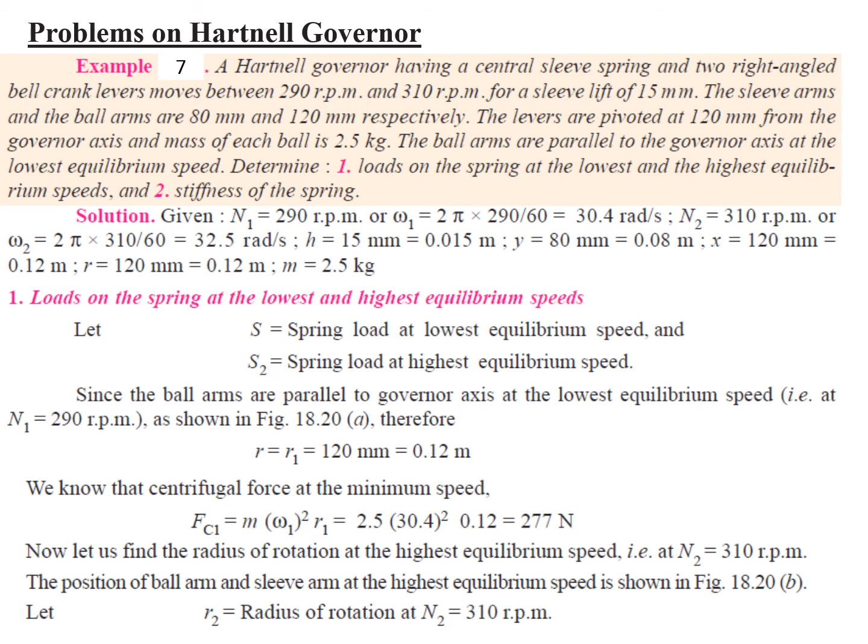See, H is equal to R2 minus R1 into Y by X. So R2 becomes R1 plus H into X by Y, which is equal to 0.12 plus 0.015 into 0.12 divided by 0.08, equal to 0.1425 meters. So now we know the value of R2.

Substitute for calculating the centrifugal force at maximum position or at maximum speed. So Fc2 is equal to m into omega 2 square into R2. Mass is 2.5 kg. The maximum speed in terms of radians per second is 32.5. R2 is 0.1425. Substitute all this, we will be getting the value 376 newtons. So these are the figures for lowest and highest equilibrium speed, lowest position and highest position.

So here it is in terms of right angle because the minimum radius of rotation is equal to the radius of rotation, that is the distance of fulcrum from the axis of rotation. And this is as he has told in the problem, it is the right angle type. So here R1 becomes R. So after finding the centrifugal force, we will be finding the loads at minimum position and maximum position, and then we will find out the stiffness of the spring.

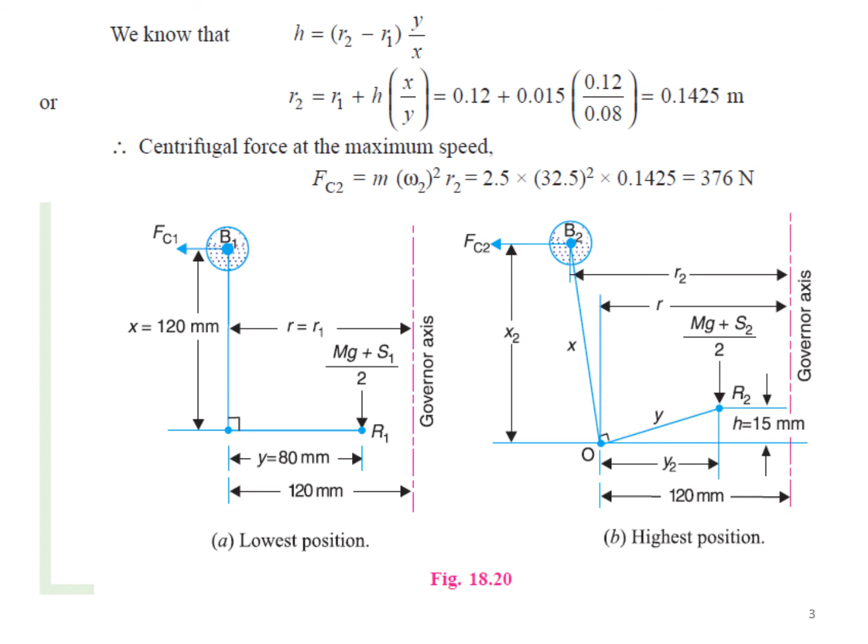See, and one more thing is here we neglect the obliquity of the arms. The obliquity of the arms is not taken into consideration for all the problems we solve here for your syllabus. What is the equation? M into g plus S1 is equal to 2 into Fc1 into x by y. Substitute all the values. So the value of S1 is 831 newtons.

Similarly for highest position, Mg plus S2 is equal to 2 Fc2 into x by y. Substitute all the values. You will be getting the value of S2 as 1128 newtons. Okay. So s is equal to S2 minus S1 by h: 1128 minus 831 by 15. That is 19.8 newtons per millimeter. So this is the equation for stiffness of the spring.

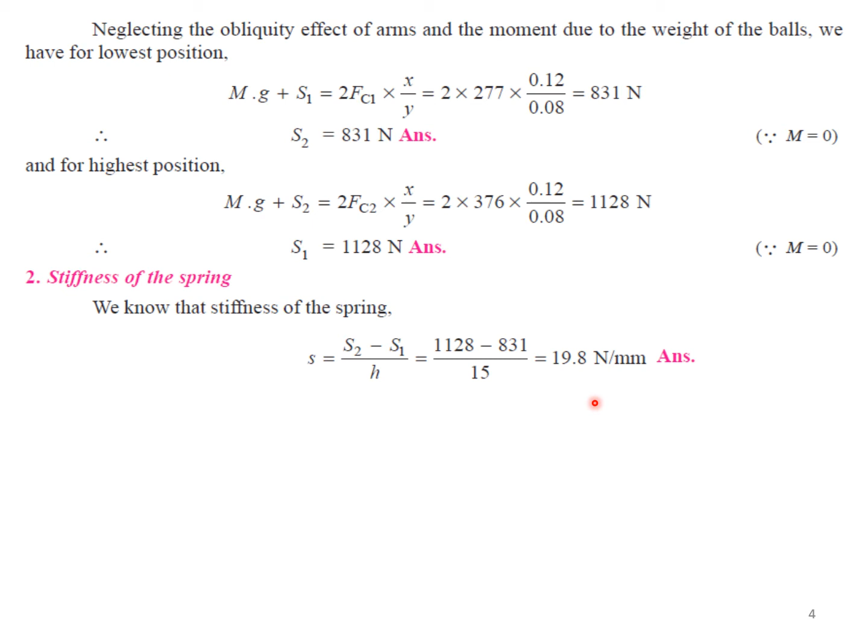So now we'll go for the next problem. Here, what is given? It is given as: in a spring-loaded Hartnell type governor, the extreme radii of rotation are 80 mm and 120 mm. The ball arm and the sleeve arm of the bell crank lever are equal in length. The mass of each ball is 2 kg.

If the speeds at the two extreme positions are 400 and 420 rpm, find initial compression of the central spring and the spring constant. So now we'll go for the given data. Minimum radius of rotation is 80 mm, that is 0.08 meters. Maximum radius of rotation is 120 mm, that is 0.12 meters. And he has told that ball arm and sleeve arm are equal in length, so we'll take x by y as 1.

Small m is 2 kg. Minimum speed is 400 rpm. Convert it into radians per second: omega is equal to 2 pi n by 60. Maximum speed is 420 rpm, converted into radians per second, omega 2. So first we will find out the initial compression of the spring.

What is the equation? Fc1 is equal to m into omega 1 square into r1, is equal to 2 into 41.9 whole square into 0.08. So substitute all the values. We will be getting the value of Fc1 as 281 newtons. Similarly, find out the value of centrifugal force at maximum speed, that is Fc2 is equal to m into omega 2 square into r2. So we'll be getting the value as 465 newtons.

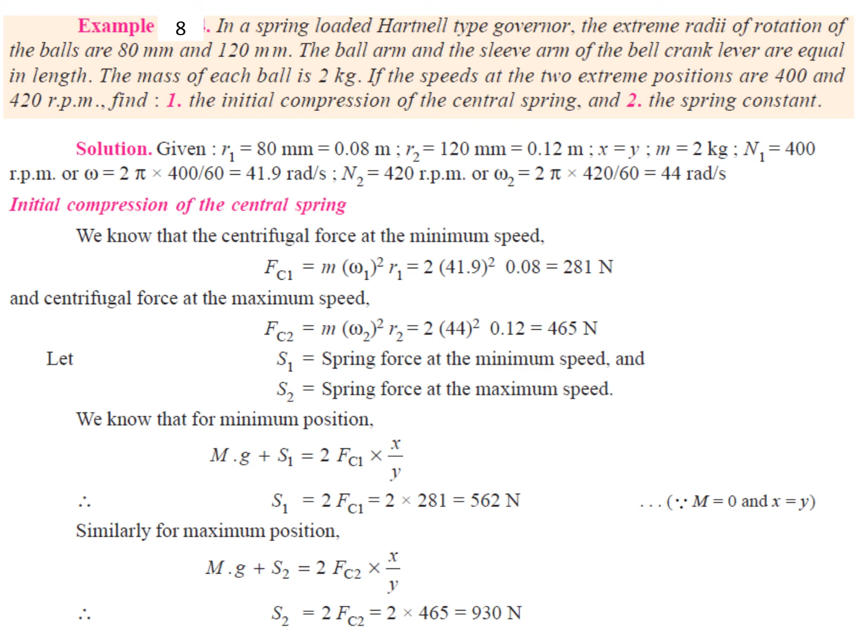So now we have to find out the stiffness of the spring. For finding out the stiffness of the spring, we need the value of h. So what is h? R2 minus R1 into y by x. Substitute all the values. x is equal to y, so it becomes 1. So the value of h is 40 mm. Stiffness of the spring is S2 minus S1 by h. Substitute all the values, we are getting it as 9.2 newton per millimeter.

And initial compression of the spring is capital S1 by S. Similarly, final compression of the spring is capital S2 by S. So if you substitute the values, you'll be getting 61 mm. And one more thing we have is spring constant. Spring constant is nothing but the stiffness of the spring.

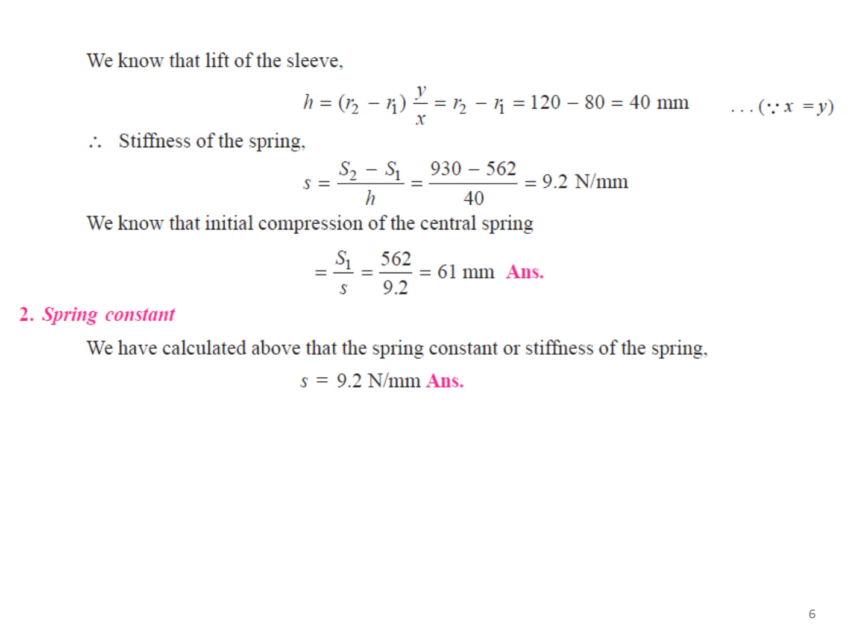We'll go for the next problem. In a spring-loaded governor of Hartnell type, the mass of each ball is 1 kg. Length of vertical arm of the bell crank lever is 100 mm and that of horizontal arm is 50 mm. The distance of fulcrum of each bell crank lever is 80 mm from the axis of rotation of the governor. The extreme radii of rotation of the balls are 75 mm and 112.5 mm.

The maximum equilibrium speed is 5% greater than the minimum equilibrium speed, which is 360 rpm. Find, neglecting obliquity of arms, initial compression of the spring, and equilibrium speed corresponding to the radius of rotation of 100 mm. So we have small m is equal to 1 kg, x is 100 mm, y is 50 mm, r is 80 mm, 0.08 meters, r1 is 75 mm, r2 is 112.5 mm, n1 is 360 rpm, converted to radians per second is 37.7 radians per second.

So first we have to find out omega 2. He has told it is 5% greater than the minimum equilibrium speed. So omega 2 is equal to 1.05 into 37.7, that is 39.6 radians per second. So Fc1 is equal to m into omega 1 square into r1. It is 106.6 newtons. Similarly, centrifugal force at maximum speed, Fc2 is equal to m into omega 2 square into r2. It is 176.4 newtons.

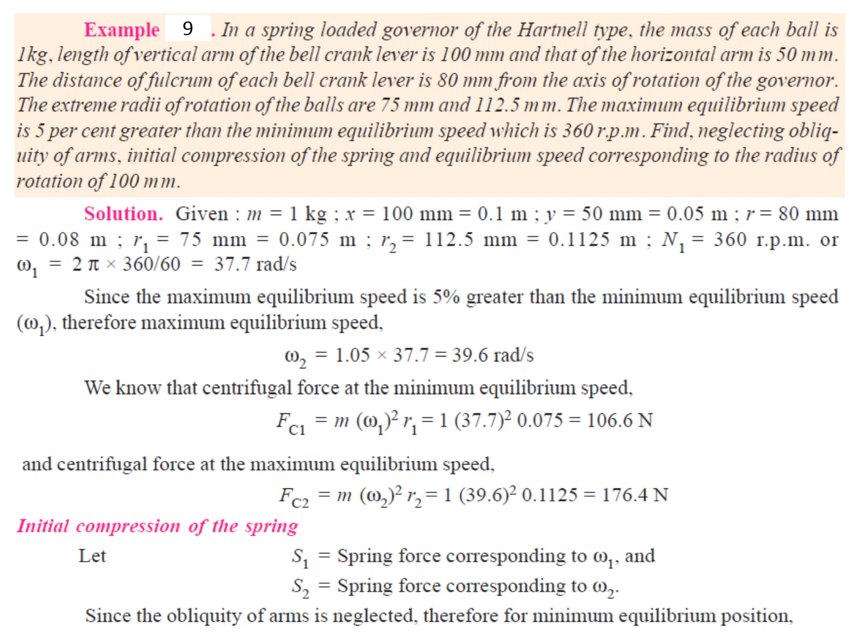So we will be finding out S1 and S2, that is the load on the spring or spring force, and as usual we neglect the obliquity of the arms. So m into g plus S1 is equal to 2 into Fc1 into x by y. Substitute all the values, we will be getting the value of S1 as 426.4 newtons. Similarly, for maximum equilibrium position, mg plus S2 is equal to 2 into Fc2 into x by y. So we will be getting the value of S2 as 705.6 newtons.

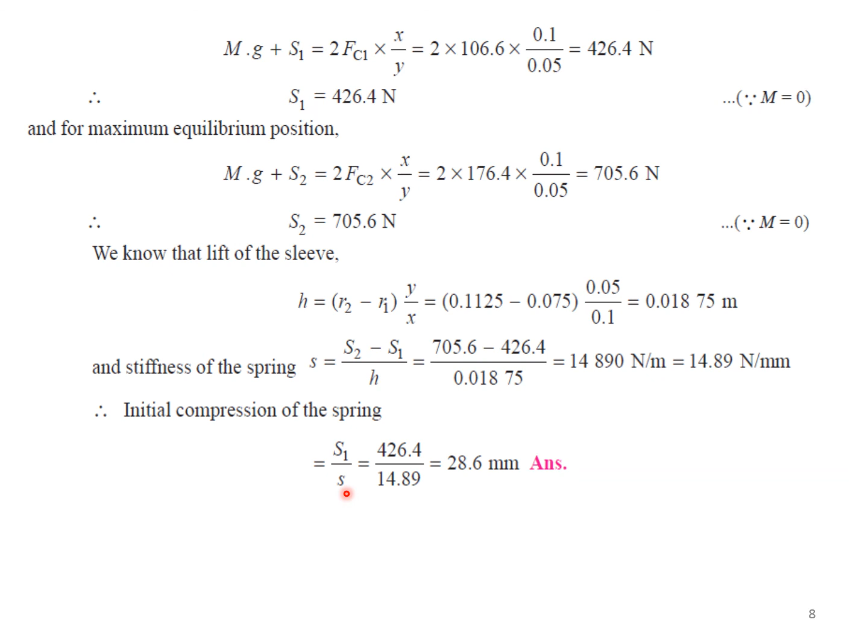Next, lift of the sleeve h is equal to r2 minus r1 into y by x, that is 0.01875 meters, and stiffness of the spring S is equal to S2 minus S1 by h. So substitute all the values, you will be getting 14.89 newton per millimeter. Initial compression of the spring is S1 by S, final compression of spring is S2 by S.

One more thing is equilibrium speed corresponding to radius of rotation. R is 100 mm, that is 0.1 meters. N is the equilibrium speed. So what is the equation? Fc is equal to Fc1 plus (Fc2 minus Fc1) into (R minus R1) divided by (R2 minus R1). So substitute all the values, you'll be getting it as 153 newtons.

So to find out the equilibrium speed, we know the centrifugal force equation. Fc is equal to m into omega square into R. Fc is known. How much is it? It is 153 newtons. So substitute all the values, you'll be getting the value of N as 373 rpm.